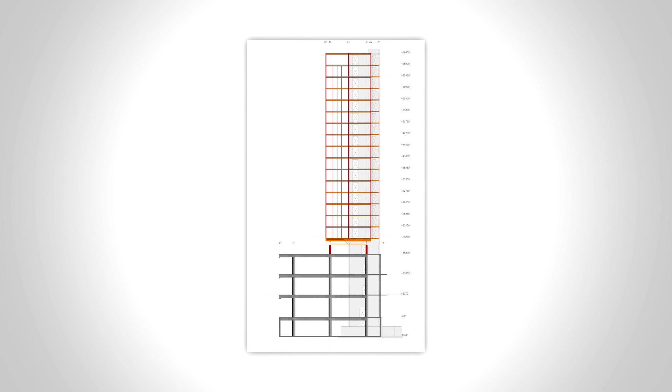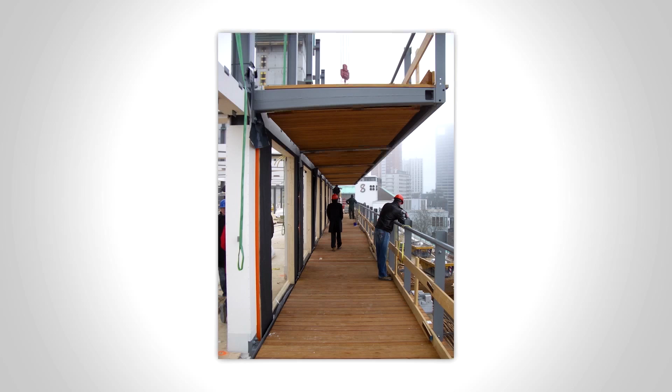We invented an adaptation of the existing stabilizing structure, which doubled the capacity of the existing building. 117 apartments in 16 stories could be built within the released capacity by keeping the mass to a minimum. An ultra-lightweight building on this scale has never been done before. Innovation was the key to feasibility of this project, obtaining comfortable apartments in terms of sound and vibrations, and an industrial and flexible building without a substantial mass. We developed an IKEA-like building package with standard elements that allow for customer-driven design and specific assembly of customized apartments. The concept is universal and offers lots of international potential.

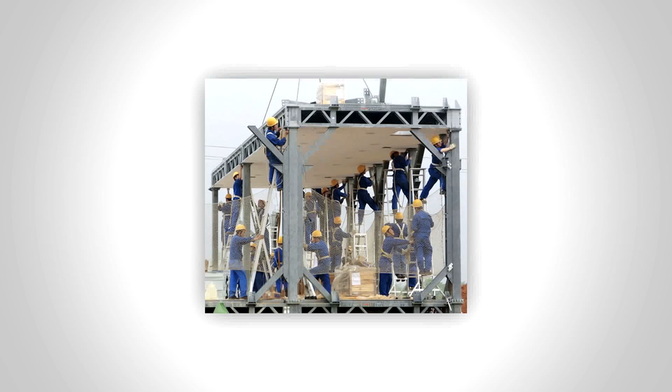Think of dense cities like Shanghai, Singapore or Sao Paulo that keep growing but have scarcity of building space. Lightweight building transforms non-suitable building space into suitable building space, such as building on roofs, above highways, railroads and on water. In developing cities like Jakarta, Cape Town and Ho Chi Minh, there is still space available. Here, the opportunity of lightweight building lies in easy assembly of the Lego-like building system by local builders, and in integrating local materials and knowledge without compromising the aimed high quality and comfort.

Lightweight building embodies many universal and sustainable benefits in the built environment. Densify cities, enhance social safety and reduce carbon dioxide emission, pollution and material use. The benefits of lightweight building differ around the globe, depending on local circumstances and specific priorities. One aspect always prevails. It's nice to have a place to feel at home. Thank you for watching. Until next time.

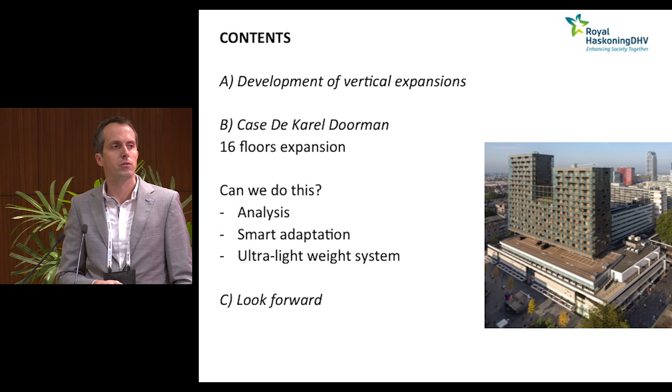So that was in very brief what the project is about, and I will explain more about the project. But first I would like to tell you how we came to the idea of this project in the context of vertical expansions, projects of our own, but also of other companies. And then, after describing the case project, which is a realized project, I will also give a look forward at the possibilities.

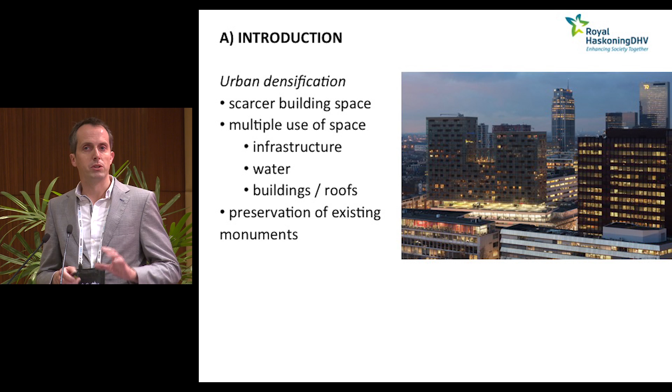Well, what we started with is the idea of urban densification. Building space is becoming scarcer and scarcer, so we're looking for multiple use of building space. You can think about building on infrastructure, on water, on or above buildings. But what is also important in the idea is that it's good to preserve existing buildings, not to demolish and renew, but look at what you can keep and what you can do with the existing buildings.

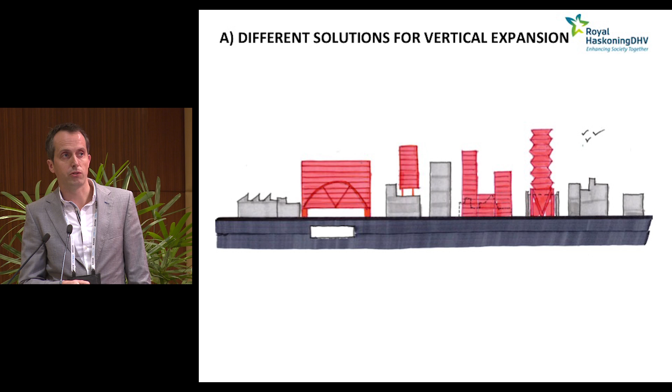So we have different solutions for that. We see them around the world. For example, if you have a tunnel structure, you can span the structure. You don't build on top, but just above. You get very impressive structural elements. It's a very beautiful example of a project like that. But of course, you also have an impact on the urban environment and the cost of the big structures.

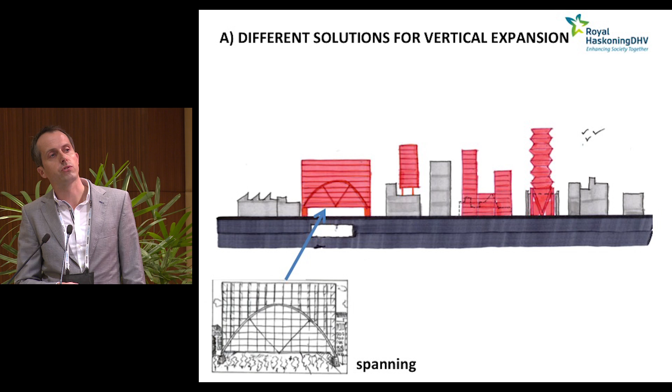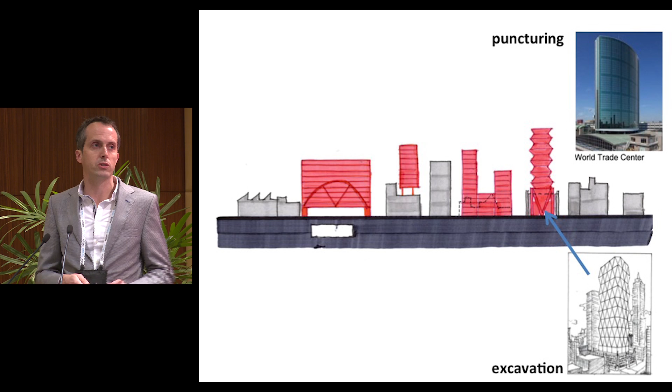Another way of thinking is keeping the existing building but puncturing it, which could be like excavating almost the building and putting a new building inside with a new foundation, a new structural system, or maybe puncture the existing building with a new core and columns and putting a new building on top. But in those cases, the character of the existing building will be gone or will be different.

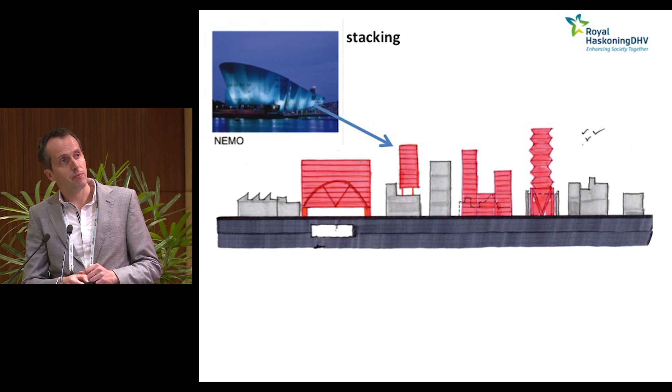So the most pure way for vertical expansions is really stacking buildings on top of each other. For example, this is a museum we put on an entrance of a tunnel in Amsterdam. The tunnel is going underwater, so there is a lot of upward water pressure. And actually, we use that upward water pressure on the tunnel to be able to put the new building on top of that tunnel.

But then furthermore, the tunnel has also its own foundation system for the original situation, for keeping down the tunnel wanting to go up. So there is also a foundation, and that foundation you can use for even more vertical load-bearing capacity. And so we were able to put this 5-story museum by Renzo Piano just on top of that tunnel already being there.

But in the case project, so in the real project, the Karel Doorman, we went 1 or 2 steps further. We didn't look only at, let's say, the clear and present capacity, or at the hidden capacity like in the example before. But what we did was also create more capacity by an adaptation in the existing building.

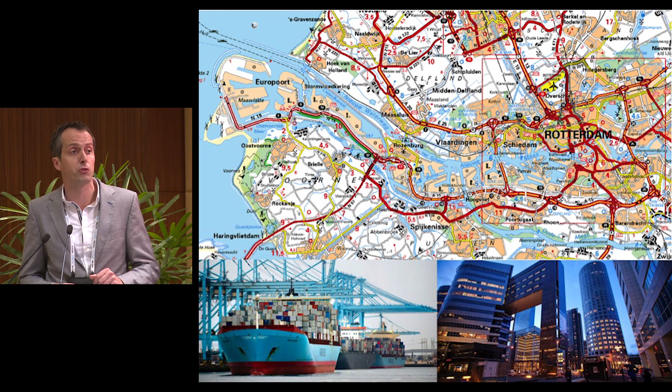First, I would like to show you a bit where we are. We're in Europe, Central Europe, the Netherlands, in Rotterdam. And Rotterdam is a harbor city. It has a bit of the character of Shanghai, I think, but much smaller. The river is really present, the ships and, like I said, the harbor. The harbor was the largest harbor of the world until 2004, and then Shanghai took this position from us.

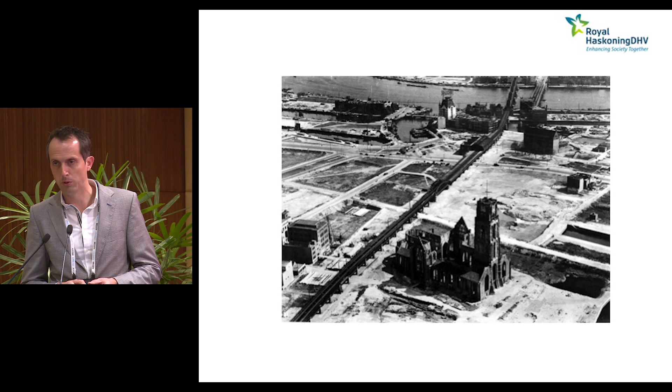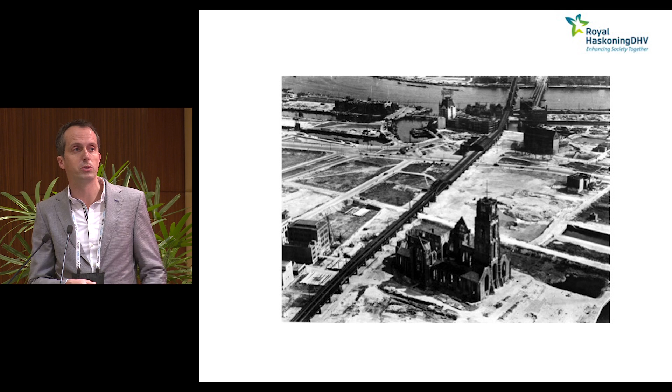Well, the other aspect is that there were a lot of relatively new buildings from the last decades. In Rotterdam, this was caused by the Second World War. There was a bombing and a big fire. Here you see a picture of the city center of Rotterdam just after the war, where almost all buildings were gone. Only a few were left. So in the 50s there had been a lot of new buildings, and the Dutch modernistic style was used for a lot of those buildings.

So we have some relatively new monuments in the city, and the project we built on is one of those, designed by architects Van den Broek and Bakema, who also designed the Van Nelle Fabriek, one of the big monuments of the famous modernistic style of Holland, which is also a UNESCO World Heritage project. So the city of Rotterdam wanted to keep this project.

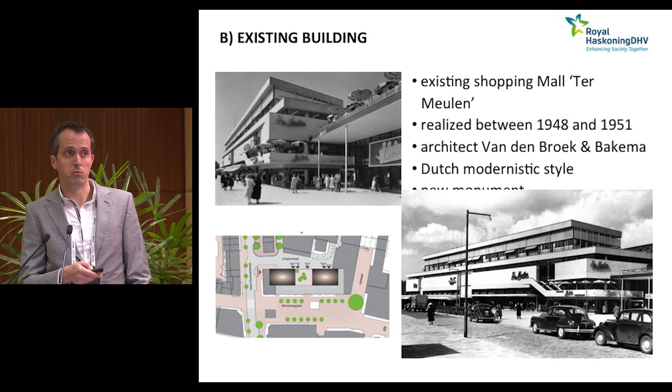And the city of Rotterdam wanted to do something more. They wanted to densify the city center with the shops and make it a more multiple use city center, add apartments, so give more liveliness and more social safety to the city center. So there had to be a substantial amount of apartments added, not only just 2, for example, but really a substantial amount.

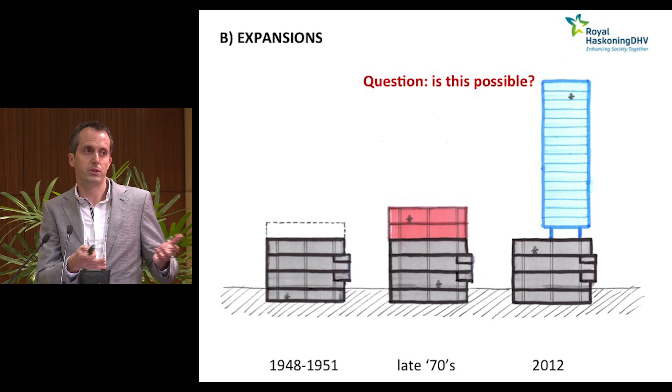So we started with this question: Is it possible to put 16 floors of apartments on top of that existing building, using that existing building really as a foundation for the vertical loads of the new building? And for that we used 3 approaches, 3 steps, let's say, and not really in this order. We worked on all those together, and in the end the concept came, and in the concept all those 3 approaches came together.

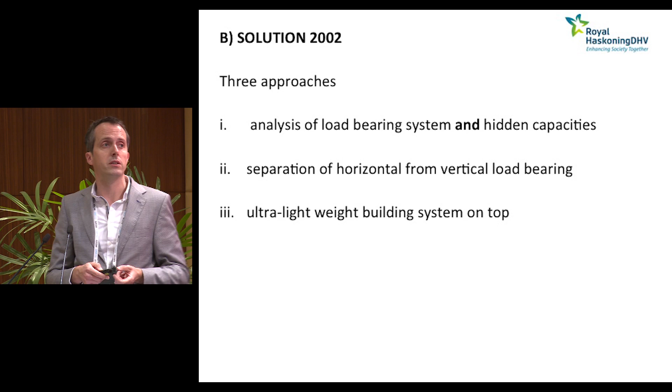So the steps we did were an analysis of the load-bearing system and also hidden capacities. We did this adaptation in which we separated horizontal from vertical load, so the vertical weight of the building was transferred in a different way than the horizontal, the wind loads. And because we had these constraints of the original existing building, we used an ultra-lightweight building system.

In analysis, we started, of course, with the available data. All calculations of the existing building and all original drawings were available, so reinforcement dimensions were really precisely defined. And very important, we also had good reports about the foundation. We had a geotechnical survey and the original advice belonging to that. But also because a new kind of pile type was used in that time, they made some test piles, and we had reports about that.

And then what was really interesting was that all the foundation was calculated in that time with the information known before construction, but we had this calendering drawing, we call it, from the construction period, in which we saw that driving the piles in became, of course this is logical, much more difficult after every pile.

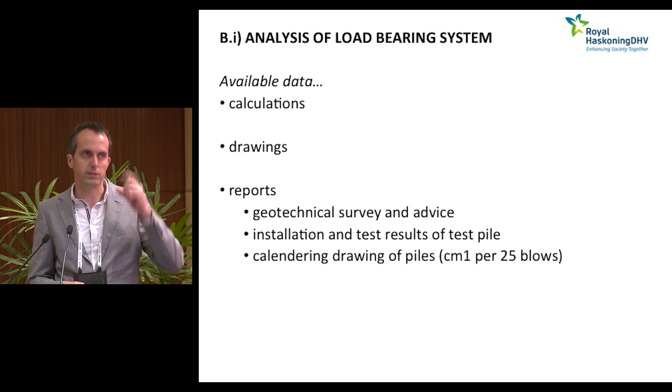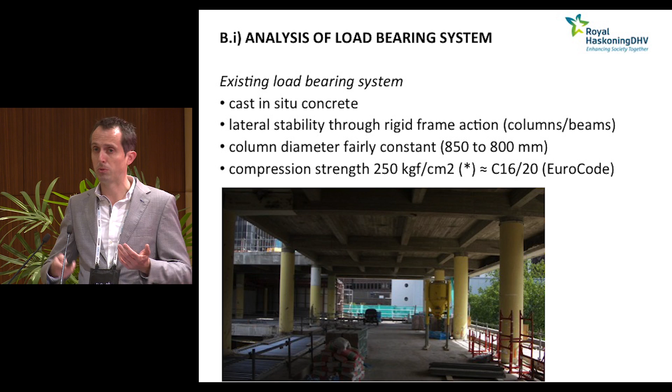So there was a strong densification of the sand layer because of the pile driving, and we used that as a starting point. So the existing load-bearing system is a cast-in-situ concrete system in which columns and beams provide the lateral stability through a rigid frame action, and that's a quite common system. You can see that a lot around. Because of that reason, the column diameter from basement to top floor is fairly constant, and that's of course important if you want to put something heavy on top.

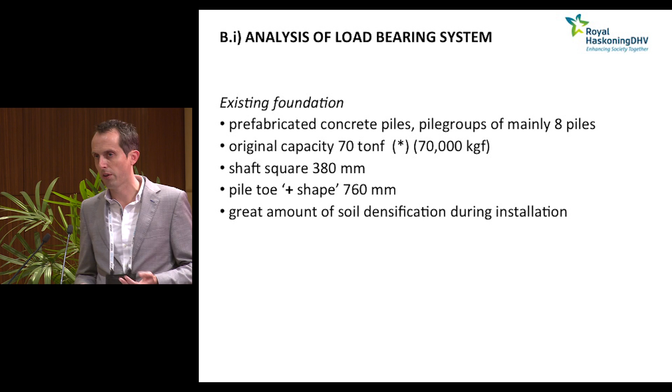If we look at the existing foundation, like I said, there were prefabricated concrete piles with a square shaft and a plus-shaped toe. And like I said before, the piles were in pile groups, and because of the pile driving, there was a great amount of soil densification during installation. So we expected the load-bearing capacity of the piles to be much higher than originally calculated.

Well, then we looked at the building. We did a lot of tests. The tests start simple with just visual inspection and stuff like that. You can see in literature, and also our experience is, that concrete quality becomes much stronger over the lifespan of a building. And of course, we also did laboratory tests, and those laboratory tests showed that the concrete quality was twice the value originally accounted for.

The same we did for the foundation. We made new cone penetration tests, and we did them really next to the pile groups, so we could see the pile capacity and the effect of that soil densification.

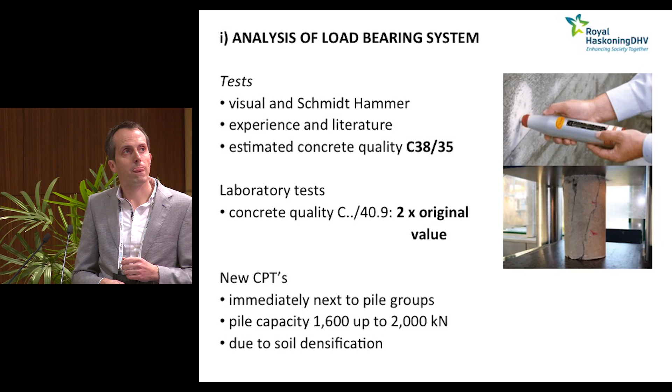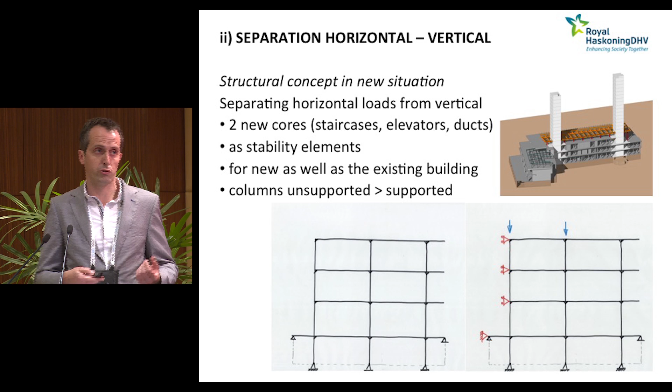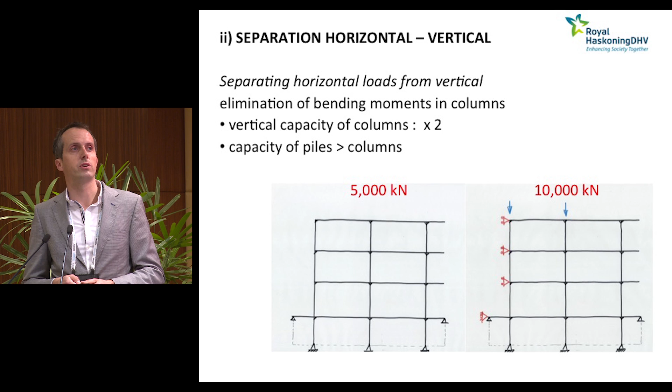Like I said before, what we did was separate the horizontal load bearing from the vertical. We added two new cores for horizontal stability, but you also need them for elevators, staircases, shafts. And we use them not only for the new building, but also for the existing building. So the existing building got supported by the new cores. And that, again, delivered a double capacity in the columns of the existing building, which we could use for the new building.

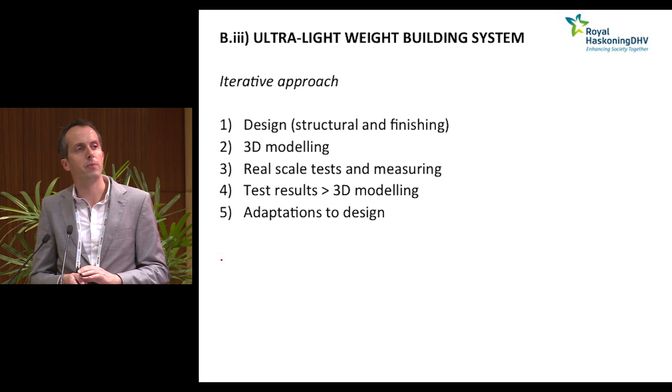So to zoom into the building system on top, that's the third item. You have to use a kind of iterative approach. I will explain that in the next slides. We started, of course, with designing the structural system, and we chose, let's say, a hybrid of a steel frame with a timber floor and facade.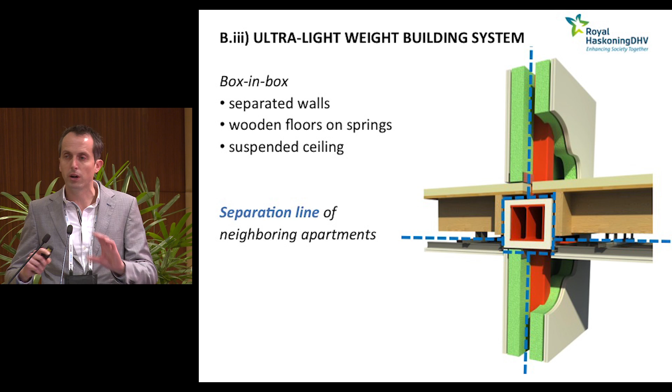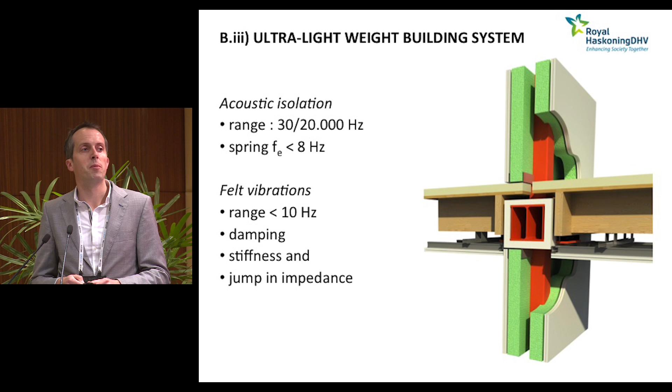So we had a target value of 1.6 millimeter per second as a vibration speed in the own apartment and 0.1 in the neighboring apartment. The 0.1 is a value at which, let's say, 50% just doesn't feel the vibration and 50% maybe just feels the vibration. So a very strict value. You shouldn't feel anything from a person walking in the neighboring apartment.

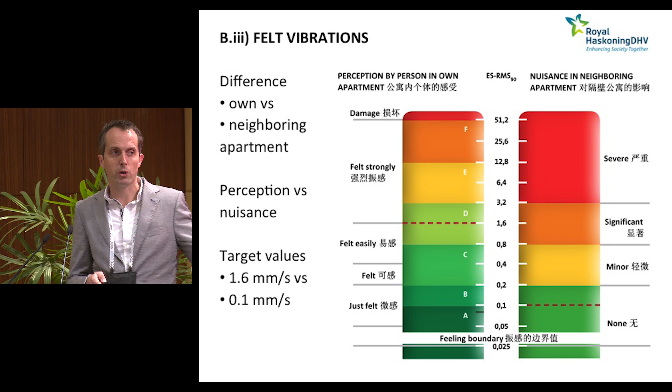For that, we did a lot of tests. After the design, we did real scale testing. And what we wanted to know, because we wanted to be able to also make improvements if the target values were not met.

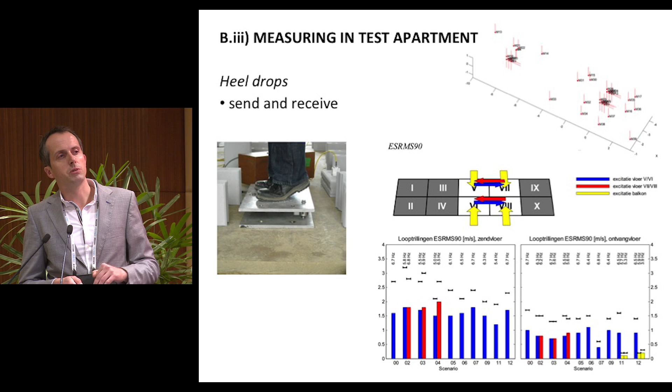So what we wanted to know was how the vibration would be transferred through the system. So we did really advanced measurements, measuring at 50 points at the same time, the vibration. Then you could, let's say, track the vibration through the building system from one apartment to the other.

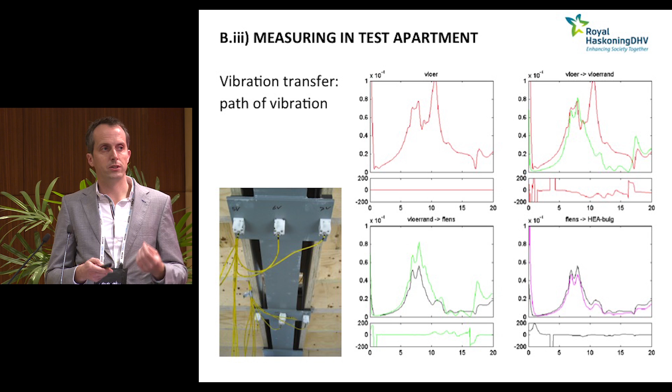And why were we doing all of this? That's because if you have a system like that, it's really difficult, or I would say impossible, to predict everything up front, how the system will act in a dynamic way, because there's a strong relation with the damping ratios, the connection of the nodes, how they work together, and it's very difficult to predict that. We're doing a lot of research projects in Holland about that. And you can, of course, be very on the safe side, but then you would not be really able to build lightweight as we did in this project.

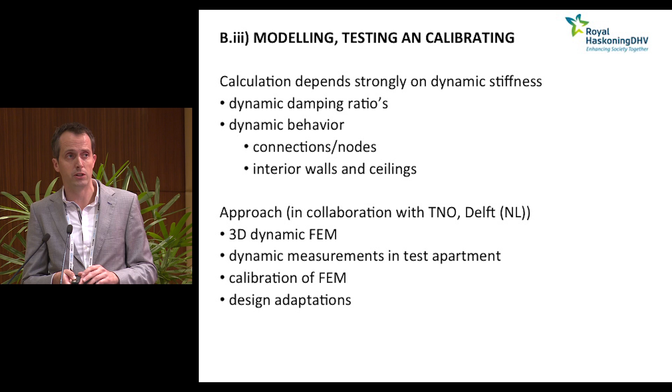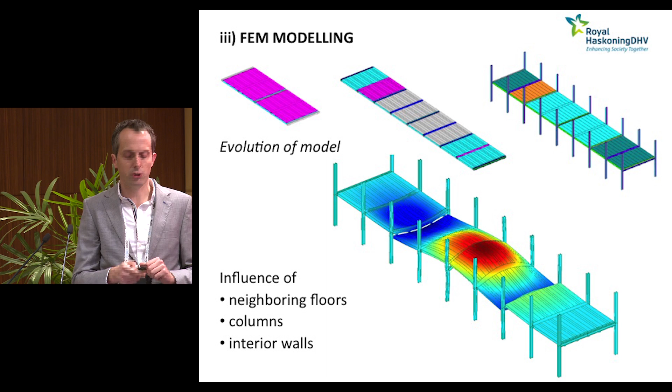So we worked together with TNO, an applied research institute in Holland, and we made these kinds of models. We were looking at how much of the building we should model to give a good, reliable prediction of the vibration levels, but not model too much, because then you wouldn't be able to understand what is happening, and it's actually a very intensive kind of calculation. So you want to keep the part you calculate as small as possible.

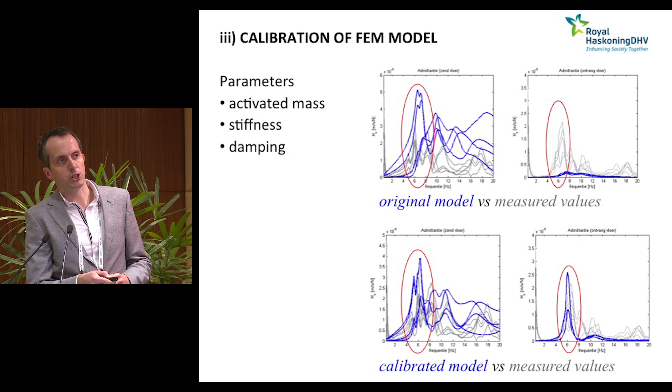Especially in the first eigenfrequencies, the first frequencies are most important, so that's where we zoomed in. After calibrating, we kept on tuning damping ratios and the behavior of nodes until the model and the measurements were close enough together. So we knew that we had a good model for designing the adaptations.

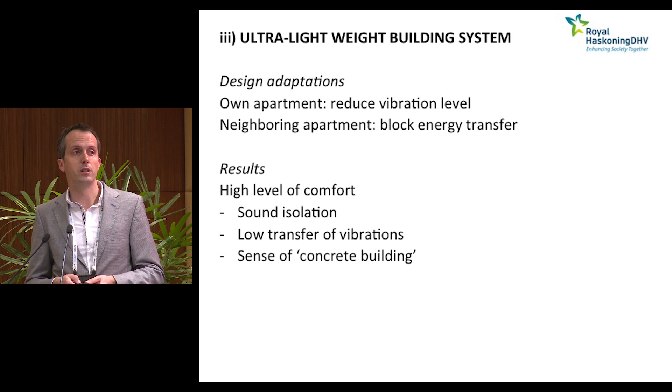Well, so then we designed these adaptations. I will not zoom into that, but the results were good. We reached this high level of comfort, the low transfer of vibrations, and our client visiting the project said he had a sense in the building, a sense of a concrete building. So I think that was the best thing to hear possible.

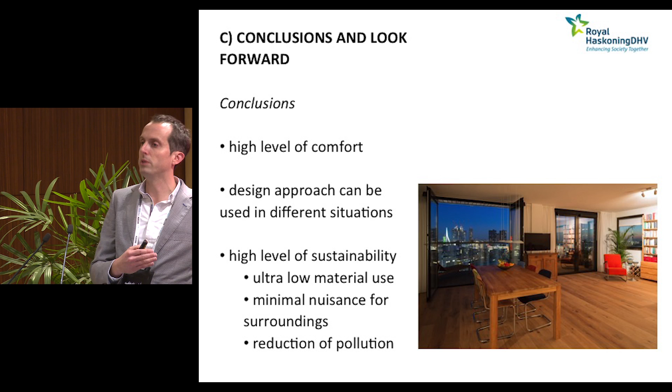Well, what is important, I think, is that I showed you the project, but also the kind of approach we used, and this approach can be used in a lot of different situations. During the last years, this project was delivered in 2012, and even before that time, I already saw a lot of buildings which would be suitable for the same kind of approach. Of course, I have to be honest, in 2002 when we started the project, sustainability was not so much an item as now. So we didn't start with this idea of sustainability, but we can say that it has really a high level of sustainability. We have really low material use, minimal nuisance for the surroundings, and a reduction of pollution.

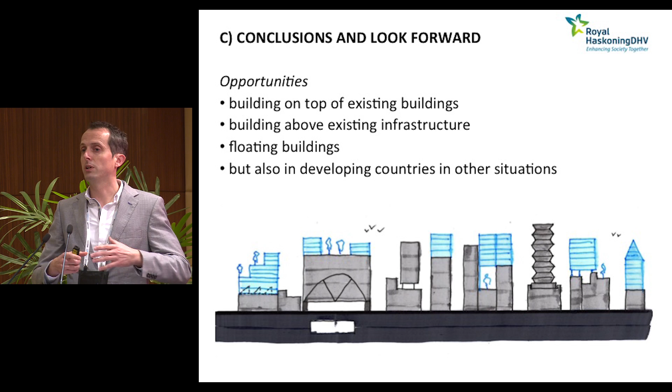And we make a very adaptable building. This was spoken about before. I don't know if you know the Dutch soccer player Robin van Persie. He wanted to buy not one apartment at the top, but three, and wanted to connect them after the building was already constructed, already finished. It was very simple to just connect all those three apartments into one big apartment with no walls in between, etc.

So what are the opportunities? I think that's really clear. But like I said, on existing buildings, but also on floating buildings, you can use this kind of lightweight structure. You could also use the concept in developing countries, using local materials, local people, local craftsmanship.

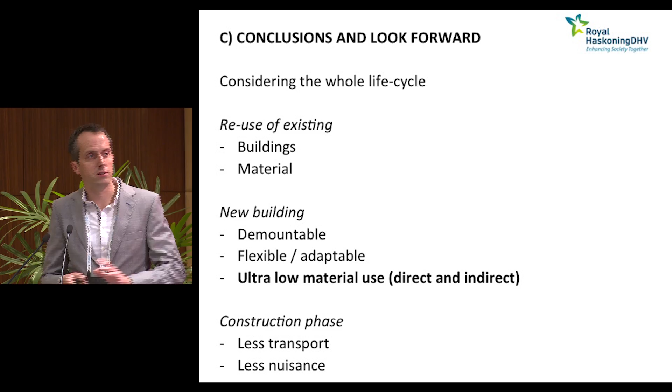Well, I think I already addressed this in general, so I would like to conclude with this. Thank you.